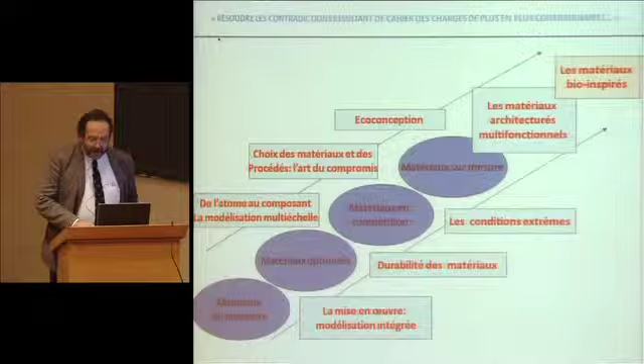That's not the reason why I put this lecture here. It's because the entire course was constructed around the rationale of going from materials encountered by chance to materials made to measure, with the very specific ways in which you can fill in the gaps in material space, by using all sorts of methods, such as combining different types of materials or different geometries, which is what I called architectured materials.

And we're now looping the loop of this course with bio-inspired materials. I'm going to tell you about natural materials and how analyzing these natural materials can help to develop ideas for new materials to further fill in the gaps in the material space. In a sense, we're really looping the loop because there's nothing more encountered by chance than natural material, and there's nothing more made to measure than an architectured material.

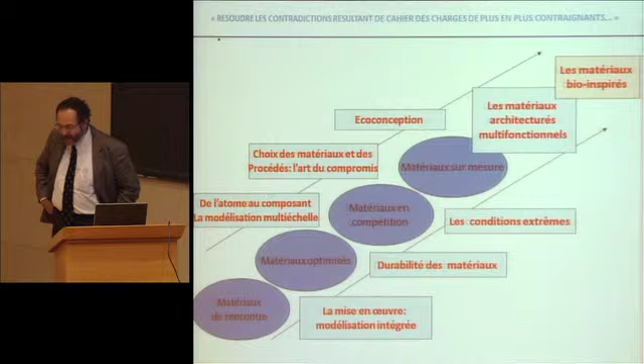So today's lecture is really in conjunction with the seminar that follows and the workshops this afternoon. It's really going to reflect the fact that it's a changing discipline. Obviously, I'm not going to cover all of its aspects in only one hour.

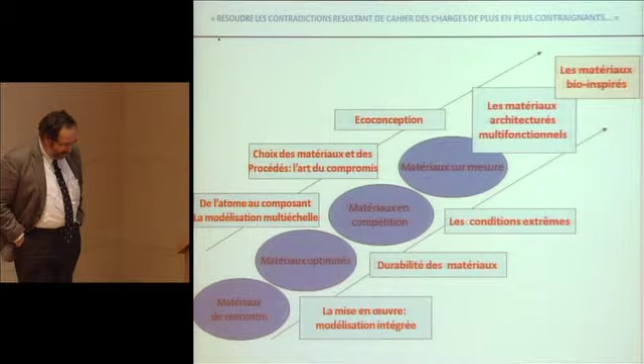What I'm going to do this morning is to tell you about inspiration that can be drawn from materials that are going to be solicited statically. John Dunlop will then, from Potsdam, give you the seminar, where there's a group who were working on biomimetism, and we'll talk about dynamics, not only the materials themselves, but their actuators.

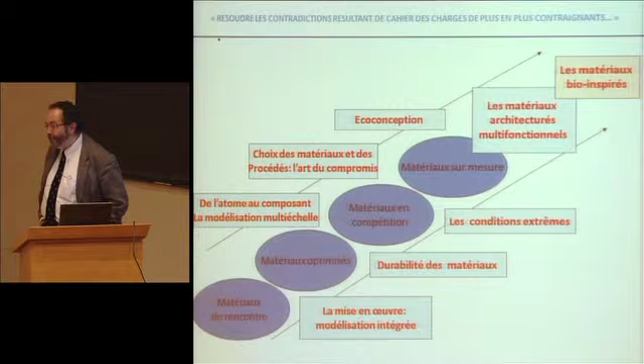And this afternoon we'll have a workshop around a certain number of issues inspired by nature. We'll have a presentation about diffuse interfaces. They're not necessarily strict interfaces; there might be benefits in these diffuse interfaces. We'll have a talk about how we can design bio-inspired materials, one about the biomimetic aspects that you can have in various devices, drones, olfactory sensors, and so on and so forth.

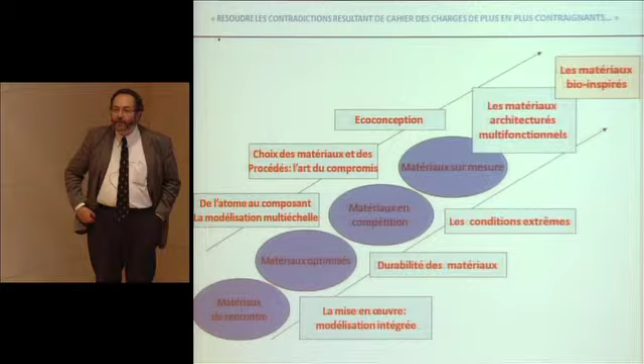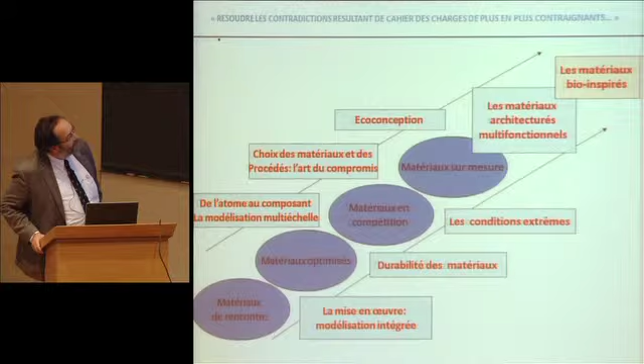And this afternoon we'll illustrate a whole set of different situations in which inspiration from nature is important. I would like to say that it's inspiration rather than imitation, which are quite two different things. We're trying to find in natural solutions ideas that can help to develop materials. So there we are, right up here at the right, and we've covered all the rest.

So I'm going to start by telling you about a particularly efficient engineer, the spider. When the spider makes a web, it has a certain number of functions. I'm not going to tell you that spiders are particularly smart animals - I don't know how many neurons they have. I think it doesn't have very many brain cells, but it can make some pretty clever things.

If you look at a spider web, it has at least two functions. One of it is to hang properly to the branches of the trees, but it also needs to dampen the shock when a little fly hits the web in order for it to be captured. So we have our good old contradictory friends, solidity and energy absorbent.

One of the engineer's nightmares in the automotive industry, for example. So the spider solves the problem by using the same polymer throughout. This polymer, same chemical composition, shown in red here, to make the outer beams, as it were, to ensure the solidity, and then it's going to use a highly crystallized material in order to do this.

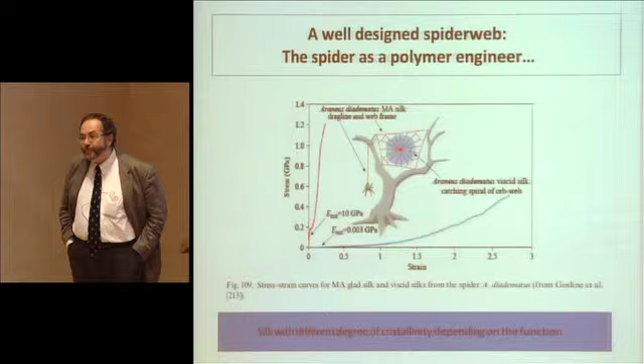So, in a sense, this is the way in which a smart engineer would have solved the problem. You can't have a single material to do both, so you can fine-tune the geometry of your material in order for it to fulfill what you would like it to.

So after this little idea of catching flies with a spider web, let's first have a look at the principles of natural materials. And we'll then see how, based on these principles, we can try to solve or circumvent contradictions in specifications, which is a leitmotif in all of this course. It's how you can combine contraries, how you can ask a material to do things that it naturally can't.

If you look at engineering materials, you have all of Mendeleev's table, so a great variety of materials, and it is manufactured from melts, powders, solutions, in order to obtain an exact design.

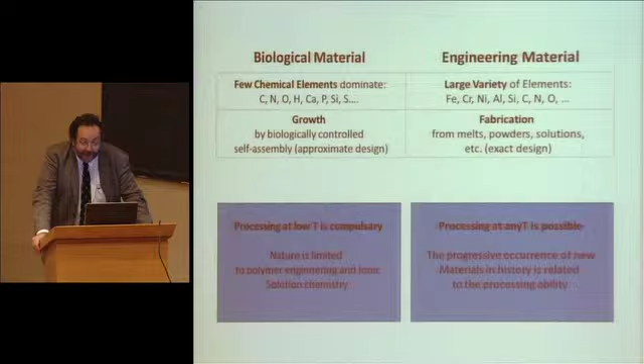If you look at what this implies in terms of processes, biological materials have low temperature processes. They're mandatory, in fact, because they're essentially limited to polymeric engineering and solution chemistry. On the engineering side, you can use pretty much all sorts of temperatures with some pretty violent processes, and the evolution of materials over history, as I showed in the first course, is very much linked to the available energy, the temperature that could be reached, which has opened up new ways to use materials in engineering.

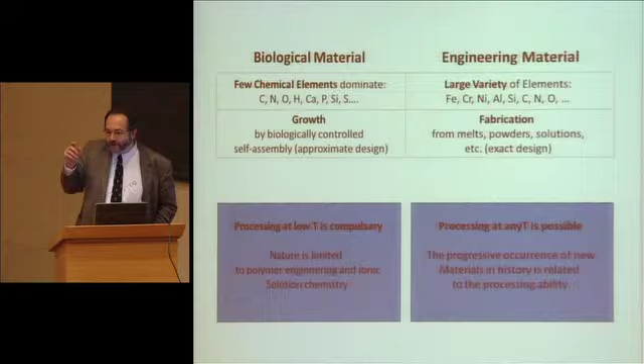So there are bridges, of course, between the two that already exist. What is called soft chemistry - Clément Sanchez is working a lot on that. We're trying to develop artificial materials with bio-inspired chemistry that avoids these very high temperature processes. As I said in the inaugural lecture, what I'm trying to show is that there are material creation processes that try to make very large amounts of material for a very small cost, which is typically the question for a structural engineer who needs tons and tons of material.

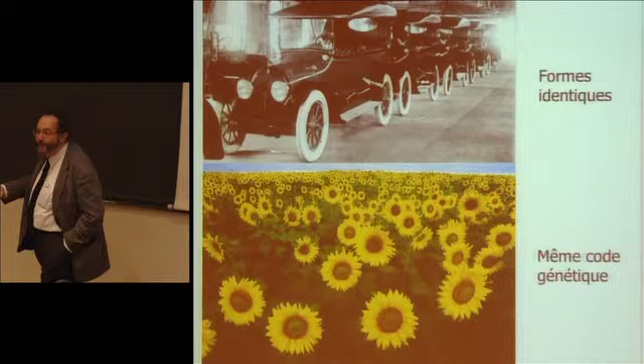So if I continue the parallel, this is a nice picture given to me by Peter Fratzl, the parallel between a Ford T, a high-tech object where they're perfectly identical and follow the plan, and this field of sunflowers. Of course, they're not entirely identical, but there's a single genetic code that allows them to look alike. If an engineer had made sunflowers, it would be less pretty because they'd all be exactly the same. And if nature made Ford T's, I'm not quite sure, we'd have something very easy to repair because it would never be exactly the same shape or size.

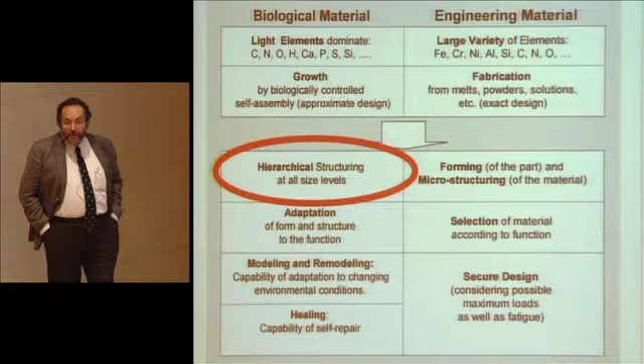First principle we're going to examine, common to all biological materials, is that they have a hierarchical structuring. The key part of the microstructure in the understanding of materials' properties. As regards biological materials, you need to think in terms of microstructure at many, many different scales, with a hierarchy, much more than in artificial materials. So there's a hierarchy of structures at pretty much all levels, all scales.

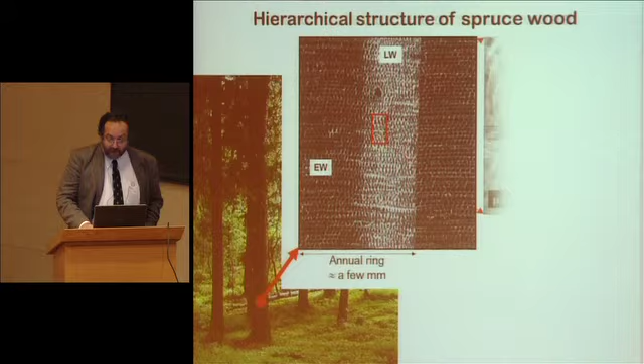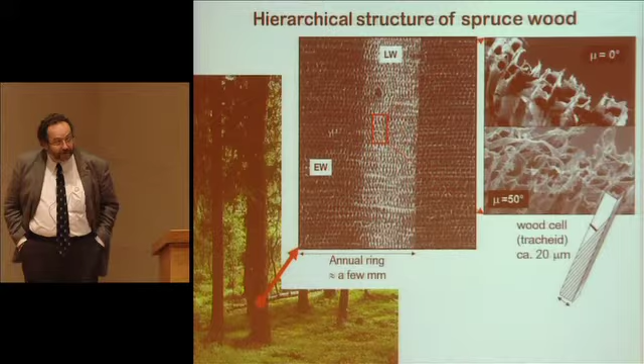First example of natural structure. And you'll have a talk this afternoon that will tell you about something that concerns wood architecture. Wood is more or less dense. The winding angle is more or less sharp, and the mechanical properties are different, and that allows you to understand a certain number of actuators. It's one of the aspects that John Dunlop will probably also tell us about.

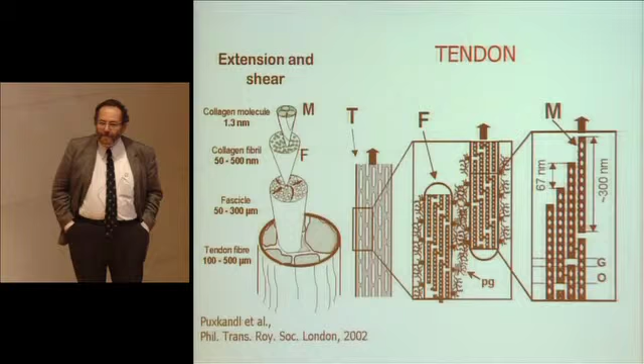Now, if I look at something from another very smart animal, the turkey - you see, spiders, turkeys, all sorts of very, very smart animals. If you look at a tendon in a turkey, you start to look at it and you say, this is starting to look very much like a cable. It's a cable of a cable of a cable. And you have a whole architecture which can go all the way down to the nanometer. All the way.

Osteoporosis, that's what it is. Obviously, it doesn't work so well when you have a hollow bone, because eventually it snaps. And for the vertebrae, that's why kids grow and adults shrink, because you accumulate and compress the vacuum formed.

So at least this type of bone is formed of cellular material. We've seen cellular materials as examples of architectured materials, and it has exactly the same elemental bricks, which result either from solution chemistry, hydroxyapatite, or organic materials like collagen, and you're basically going to have exactly the same result. Either you'll have the cortical bone, which is the bone around it, or inside, the trabecular bone, which is the more porous material.

So you have a number of ideas that seem to appear very naturally. In fact, every time you have all of these scales that stack one over the other, one interesting thing is every time one of these phases is fragile, we try to make them as small as possible. Damage resistance, which is another nightmare of the engineer, is concerned here. So, what are the main benefits of scaling down, of having smaller, fragile sections?

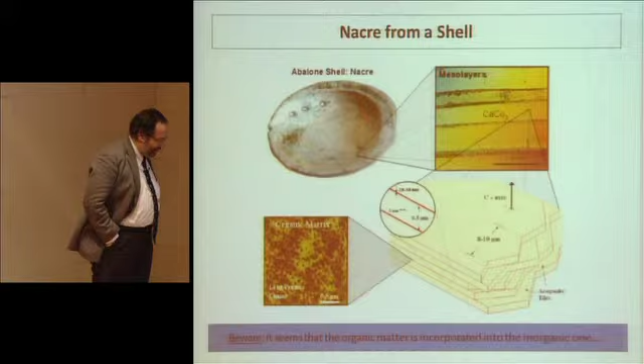This is an emblematic example of biomimetic materials. Look at the oyster shell. It's a fantastic material. Every time you eat an oyster for Christmas, you can notice that it's very tough, and you can actually cut your fingers when opening them.

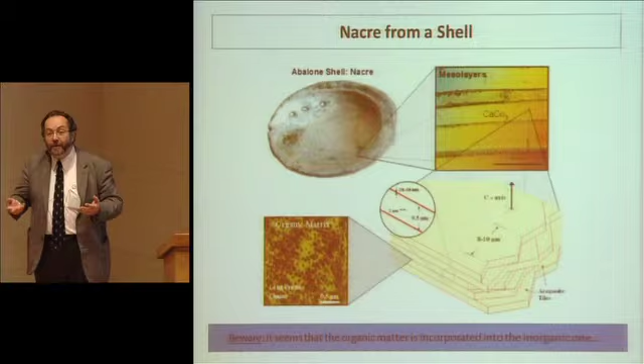But from the brutal point of view of the engineer, you have a set of platelets which are fragile, which are pre-fragmented. Starts to look like what I was telling you about interlocking materials, and they're sandwiched with organic matter, which is not very rigid, but which has a very high energy dissipation capacity. So when you want to crack that, the crack ends up all bogged down into the biological material, because it absorbs energy, this protein fraction. And the crack's energy is dissipated very efficiently.

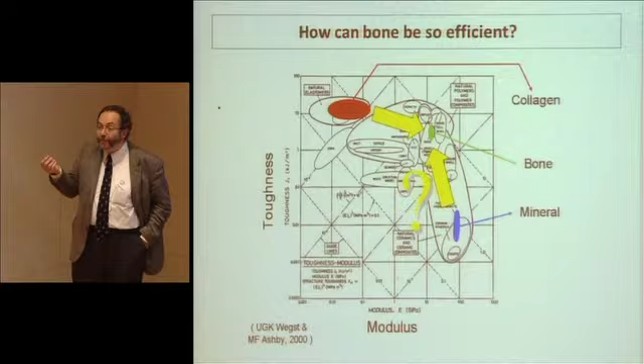So obviously mechanics is more subtle than just mixing two things in heterogeneous environments. You know how to create a certain number of landmarks where you're expecting a particular composite. Meaning that what we've done is that, in a sense, we've modified the properties of the constitutive material simply by integrating it into the composite in the manner in which you do this.

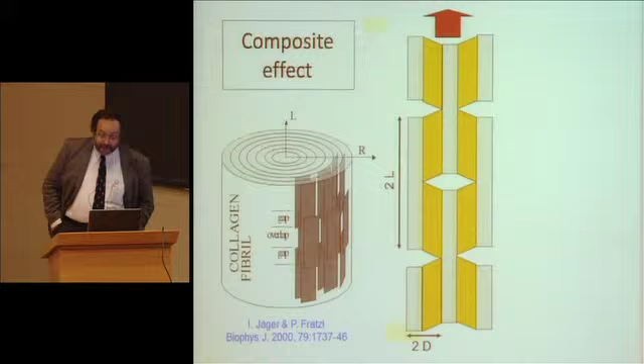One of the visions of the composite effect could be encapsulated like this. I think it's quite interesting how Potsdam has examined biomimetism. It's to try to simplify things as much as possible, not just to describe the mechanical properties — you just need adjustable parameters for that — but to draw from your understanding of the mechanisms a few simple principles that are going to allow you, at least on paper, to develop interesting new materials.

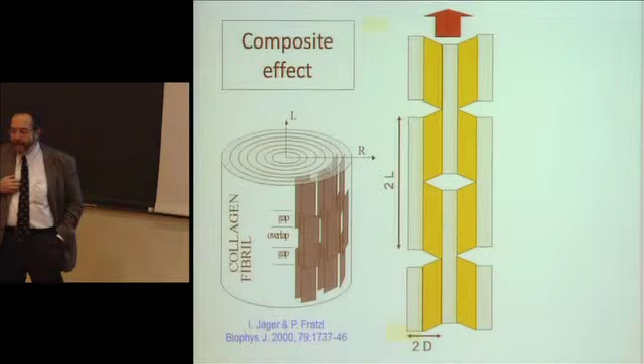One of the things that was done was to note that the structure you have in a composite is essentially formed of soft and hard matter, and what you have here is an aspect factor. You have a length that is much longer than the width. If you look at a composite such as this, you have some very rigid elements and a matrix which essentially transmits shearing. You can see that the modulus of the composite is essentially the shearing modulus of the matrix, which is low, corrected by the aspect factor between the length and width of the element.

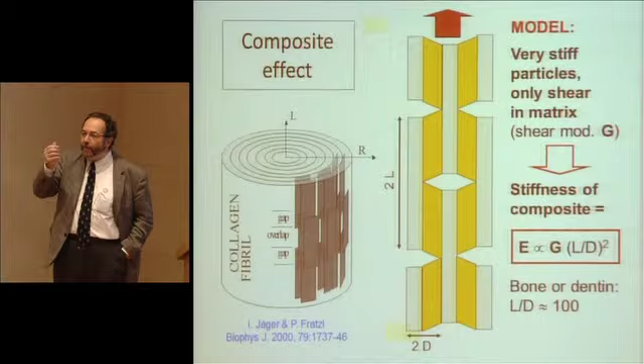If you take bone or dentin, which is what constitutes your teeth, you can have a factor of 10 to the power of 4 between the shearing modulus of the polymer and the traction modulus of the composite. What you can draw from that as an engineer is: you can be in a situation where if you have a very powerful aspect factor, you can have a much higher modulus than the modulus of the weakest part.

Second thing, this is truly mechanical. People who work in mechanics hate scales, and physicists hate limit conditions. But beyond that, if you look at the scale, imagine that there is a crack in the hard part, the grey part here.

I take a crack of length A, and if I want to calculate the stress it can withstand, I say it's essentially the dissipated energy required to propagate it. So you have interface energy with a rigidity modulus, divided by the crack length. What we're saying in terms of physics is that when you have a crack of length A, what allows it to propagate, if you're releasing elastic energy, happens within a volume that varies as the square of the crack length, and that varies with the length of the crack.

So you have one term that varies like the square and one that varies like the length, and you obtain a length below which the crack does not propagate and above which it does, and it depends on the elastic energy that is stored.

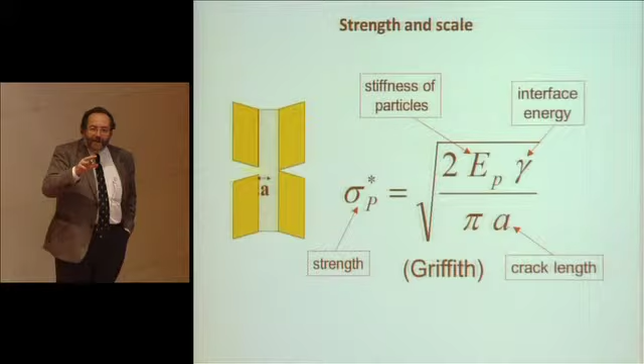So I've slightly exaggerated, but this explains in a sense why bones, wood, and mother of pearl shells can be interesting in terms of damage resistance and damage tolerance.

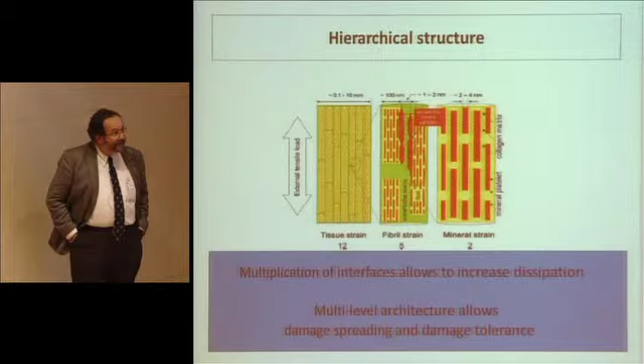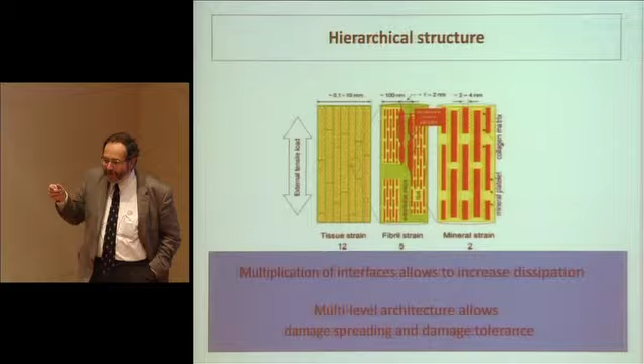So once you've done that, you have another scale. I've only talked about one type of architecture, one scale. I can't go into much detail here, but the basic idea is that when you're making a composite of a composite of a composite, a whole hierarchy of architectures, you end up in a situation where cracks are always subcritical versus the scale above it. So the crack propagates very, very slowly, giving you damage tolerance that's particularly effective. These are ideas that have been developed by Gao.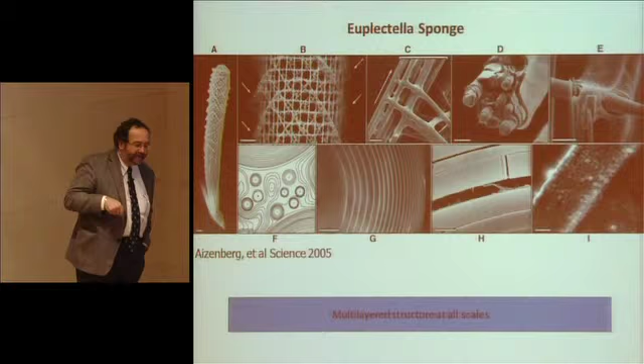The optical quality of the glass is amazing. It may have an influence on the reproductive mechanisms of the shrimp. It's very good optically, but then of course glass is not very damage tolerant.

And in fact this cage structure is cabled — it has beams and cables, and each of the beams is an onion peel structure. There are a great number of successive layers of glass layered with organic material, meaning that this material is particularly tenacious.

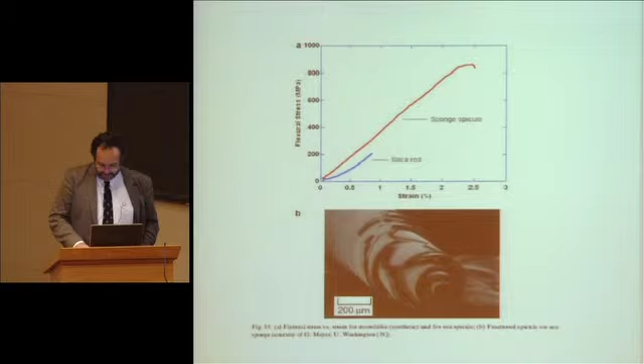So this is the example of a silica rod, a normal rod, perfectly — you can just run it through a platinum mold. Then you can take the same glass structures with one of these onion peel structures, and you will see, in terms of the breaking point and so on, the difference.

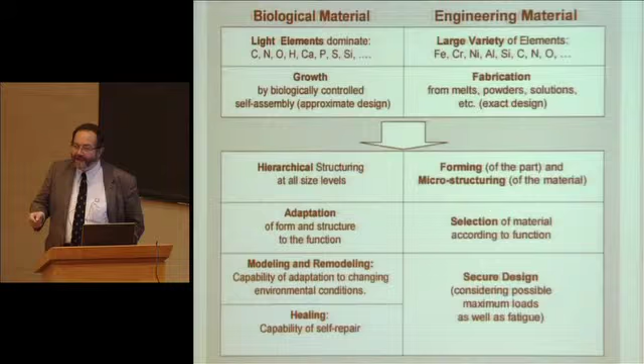So let me now return, now that I've just looked at living materials — I've looked at them as if they were dead, wondering why it works so well. Now we're going to do something else, a little bit more subtle, which poses a number of problems: we're going to look at living biological material that's alive and how it grows.

One of its characteristics is that the system can adapt when there is a low variation in the conditions. Imagine if you have a bridge, when there's a flood, the feet of the bridge will swell.

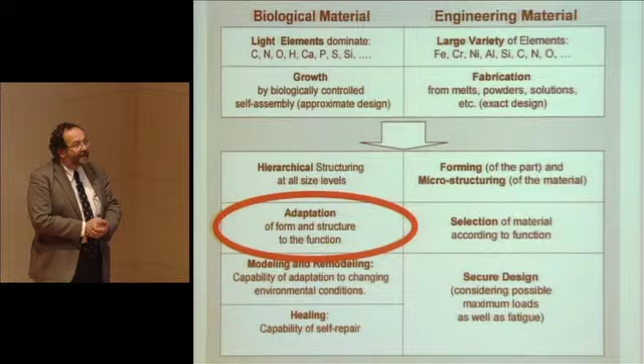What you do is that you build them. When you build a bridge, you try to factor that in, make sure that the bridge won't be swept away.

What's interesting in nature is that, in a sense, if the variations are not too brutal or extreme, there can be an adaptation. Evolution is not the right word, but there can be an adaptation of the structure that is in the making.

Don't confuse the Eiffel Tower and a tree. They essentially have the same function: to climb as high as possible with a minimum amount of material in order to not buckle under its own weight. So in 1889 it was to show how clever we were, and for a tree it's to go up as high as possible to catch the light as much as possible. Basically it's the same purpose, mechanically.

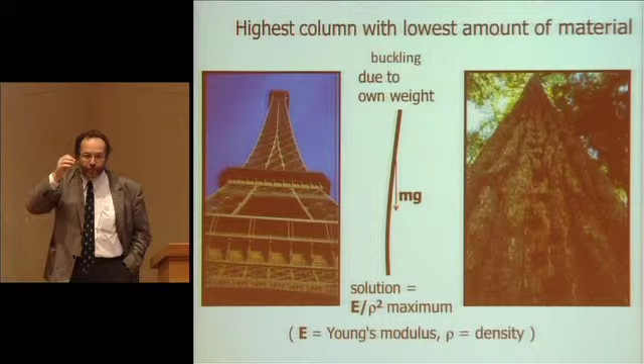So the result is to say we need to find a material where the root of the elasticity modulus divided by its density is maximum. You want to go as high as possible with a column structure which must not buckle under its own weight, which very quickly brings you to the fact that the best material to make a tree is probably wood, which is not really much of a surprise.

But one thing that's interesting is that you may imagine a tree growing unfettered. You can see it here if it's growing in a coastal area with a lot of wind, and there you develop a certain number of structures. You have roots that are bigger on one side than on the other. The tree, in a sense, develops its own substance to adapt to outside stress and solicitations. It can adapt to these unpleasant conditions as long as they're not brutal. If there's a hurricane, the tree's uprooted. So, the adaptive growth of the tree.

Let's have a look at another way that this can happen, which I think is very, very pretty: how you can play with the architecture on the level of the cell. You have these cells here, which are a fibrocellulose composite with this filament wrapped around each of the cells.

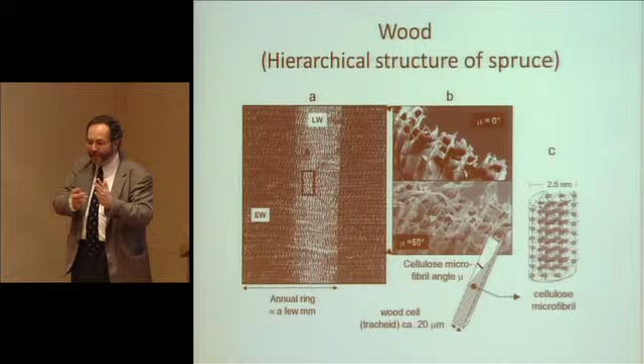So if you're in mechanics, if you want something very rigid and very easy to deform, you again have your schizophrenic engineering problem. You'd think it's not going to work properly, because if you want high deformability, if you want to pull the cell, you would want your wire to be wound this way, but if you want it very rigid, you would like them to be positioned in the same way as the pulling. So if you want wood that's very flexible, you need, looking at the stress axis, something perpendicular to that. And if you want wood that's very rigid, you're going to wind that along the axis.

It's something that can be measured. There have been experiments carried out by an Austrian team consisting of X-ray diffraction, essentially using the same experimental tools as what is used in metallurgy. You can measure the crystalline orientation of the cellulose fibrils, and you can actually take each of these little cells and measure the elasticity modulus and deformability.

Easier said than done. These are micro machines that can allow you to do that. You're pulling on sort of little micron hairs, but depending on the fibril spiral direction - where the angle is close to zero, meaning it's as close as possible to the traction axis - you have low deformability and high modulus, and when the filaments are wound more and more in the circumference of the cylinder, you have a low modulus and high deformability.

So you think, as a professor in materials mechanics, this is great fun. If you take the branch of a tree, the interesting thing is that the only thing that's alive in a tree is the edge. In the branch you have a history of the tree. People who do climate history love it because it allows them to know what the interval between summer and winter was 600 years ago.

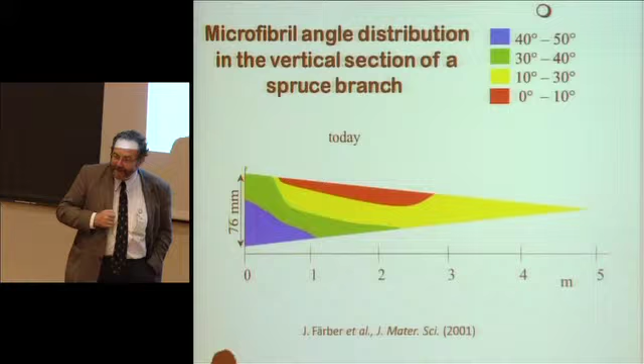But here we're just going to take a branch picked up by the Austrian scientist, who is going to be measuring the cellulose microfibril angle distribution. The situation we have today is that the external part of the branch has 0 to 10 degrees.

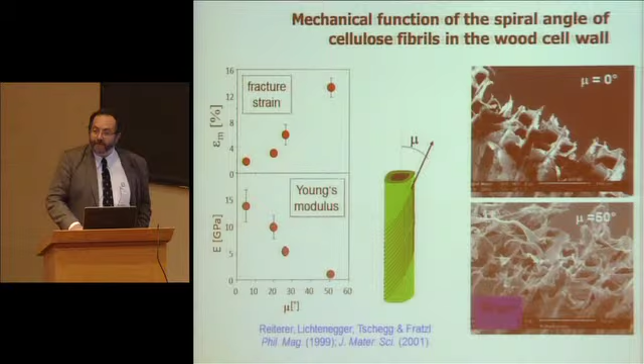So it's a very rigid part, and as you move away from the upper part, you have a fibril spiral angle, which is around 40-50 degrees, something very flexible.

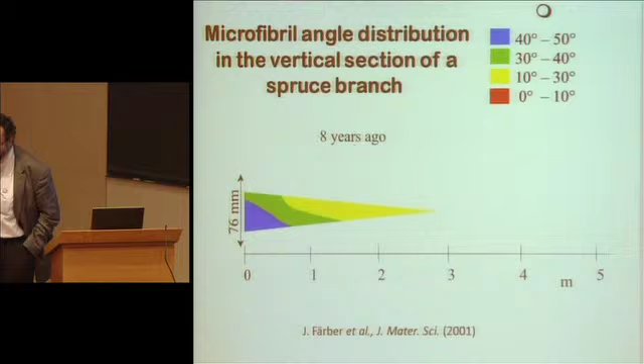So if you look at this tree branch, if you look at the rings, the circles in it, you can have the history of its life. That's what it looked like 5 years ago, 8 years ago, meaning that 8 years ago the branch in this Austrian spruce, in a place full of snow, grew in order to have the capacity to bend when snow falls upon it. So you need to have something flexible.

And gradually, as the branch grows, it needs to bear more and more weight, it needs to extend further and further, it needs to withstand snow more and more, and it's going to need to be increasingly rigid. So what you have here is functional adaptation with the growth of the object, adaptation to the structure at the smallest scale to obtain this type of growth.

So that's the tree solution. The bone has another solution, which is not to adapt the finest architecture, but to adapt the highest architecture, meaning that for bones you adapt in terms of the cell structure and not in terms of the assembly between mineral and organic substance.

So if you look at a bone, that's something else which people in mechanics find completely fascinating. Nothing new, this interest in natural solutions. It's what has been called Wolff's rule. He had very rightly said that a bone was a Gothic cathedral - in the sense that structure calculations were done almost by hand and not with computers, the way in which the Eiffel Tower was calculated, essentially.

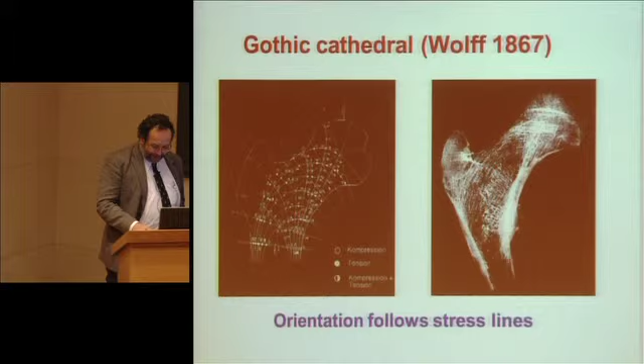I don't really believe in a particular finality, but this seems to work very well.

What has happened is that here there's a dynamic balance that makes it possible to spread the bony material in a sense to address, to answer the load to which the vertebra is subjected.

If you think of a baby that has just been born, and just paddled around in the placenta for 9 months, G equals 0, floating in water - you wonder why they actually bother to come out at all. But babies...

Baby bones are essentially isotropic. And then, of course, gradually, they've just discovered this thing called gravity, and the bones start to structure and spread the mineral substance around in order to address outside stress, which is not very violent, except when they're actually born. And then gradually they're going to move around, they're going to start running, and the bones are going to grow to respond to muscular effort, which is why when you send astronauts up in space...

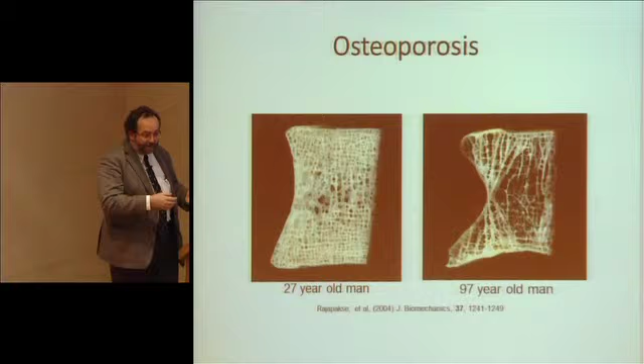I'm sure you've always wondered why they sit around space stations cycling or running around. It's not just to keep them busy, it's because they would tend to be empty, to lose their mineral content, and if they come back to Earth they break, and you can't break astronauts, they're expensive things. So they need to have this force to force them to organize the material to withstand an external force.

So what actually happens microscopically? It's not that clear, but I'll give you a version that would probably make doctors scream. It's really an engineer's approach. There are 3 types of cell. I'm sure John will correct me if I'm wrong.

You have osteoblasts, which deposit the mineral substance. You have osteoclasts, which remove the mineral substance, because mineral is something very precious in human beings. So the trick that bones use is to place the mineral substance just where you need it. It's not just saying, okay, I need to go and get some outside - it works by local recycling. So that's what osteoblasts do. Osteoclasts destroy.

They take the mineral substance where it's not needed, and the osteocytes tell the blasts and clasts where mineral substance is needed or not. So essentially you have a structure. This can be connected to the piezoelectric properties of hydroxyapatite, but there's a signaling structure that's not that easy to comprehend. You have cells that have the capacity to say where there's stress and where there isn't, and to carry the substance from where it's not needed to where it is. If you think about it, that's pretty smart.

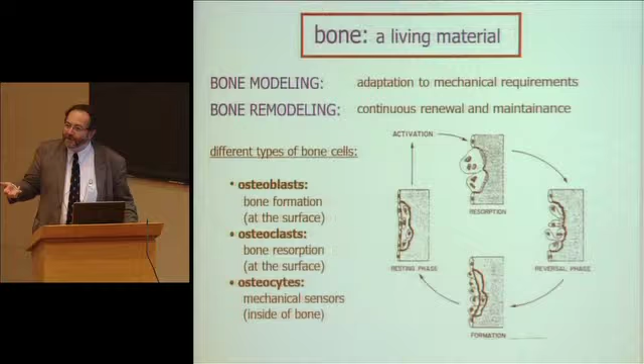You can actually look at what's happening in a bone to try to imagine methods to make aircraft lighter. So the parallel between bone and wood, they're both structured materials, probably not only structured materials actually. The bones are of course structured materials, but they're also a calcium reserve. So I think you need to be wary of finalist approaches, because you can always say that it's perfectly optimized, but in fact we don't really know why.

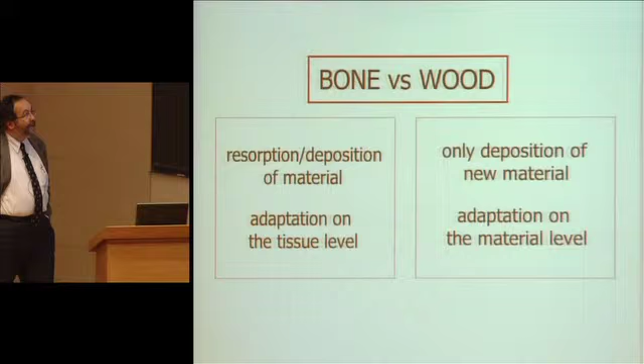As a specialist said, the bone is a solution to a problem, but what's the problem? How you can adapt a structure and architecture based on outside stress. If you take the bone, you have a resorption deposition of material, an adaptation on the tissue level, meaning in the porous structure itself. And if you take wood, you only have deposition of new material, and adaptation occurs on the material level, in the exact shape of the composite.

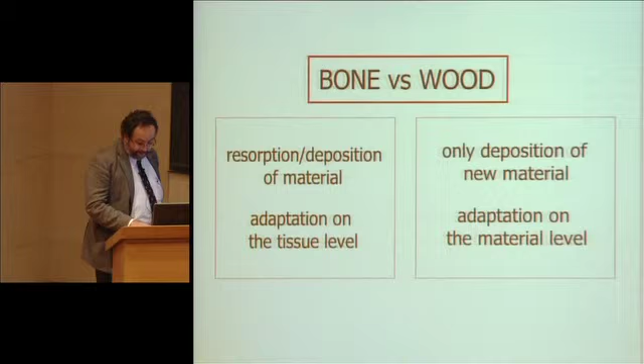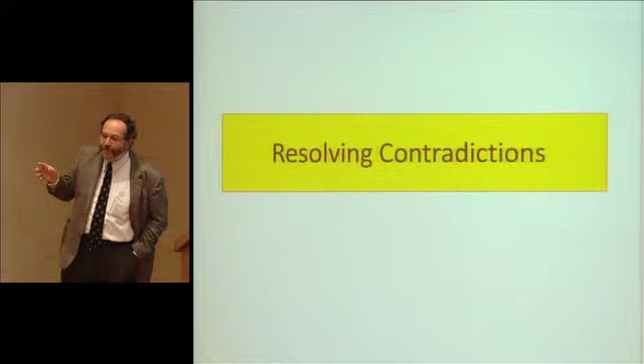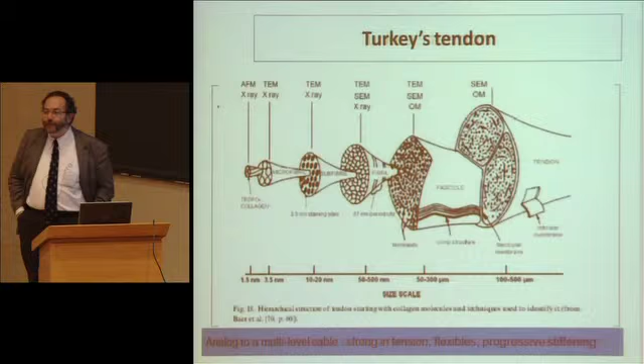Which brought us to identify a few essentials in the structure and production of these natural materials. Of course, this only happens through gentle chemistry, no brutal chemistry. So let's look at resolving contradictions, which have very much been the leitmotif of this course.

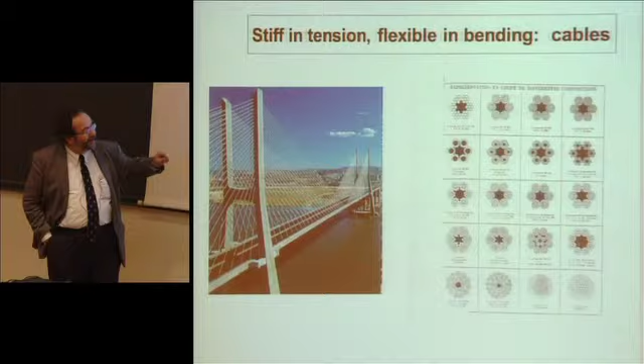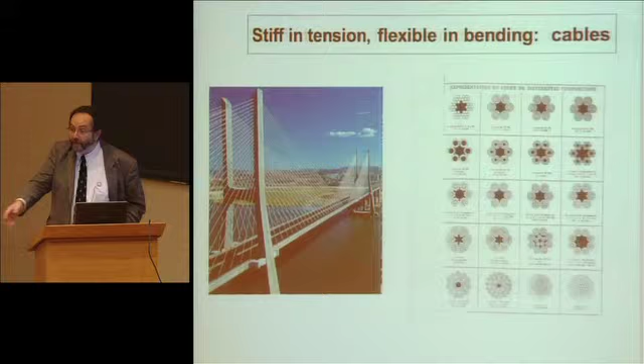We didn't wait for bio-inspiration to create architecture systems. It's actually quite interesting for people who have a curious mind. These cable architectures are actually approaches that are very often empirical. To try to have a scientific approach that's not empirical but purely mechanical is something that still needs to be further explored. So just to show you this fine picture of a bridge and to tell you that there's plenty of things that could be done. It's not just civil engineering that should have been solved 150 years ago. Still hasn't completely.

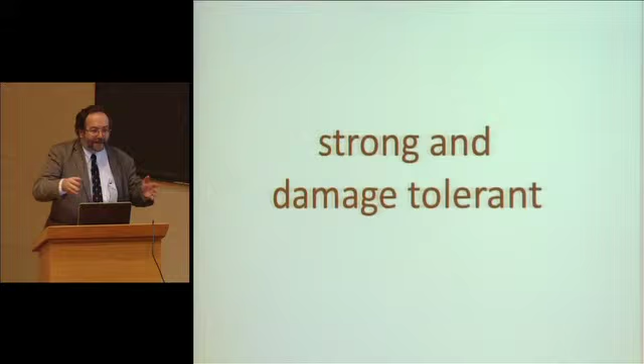So let's look at my favorite contradiction. We want something that's strong and damage tolerant. I know, it sounds like I'm a bit obsessed with that, but this is one thing that we saw.

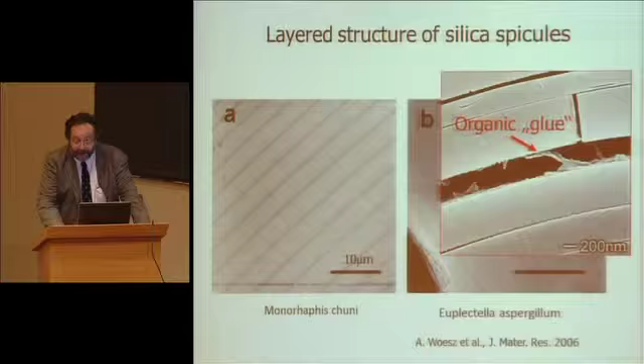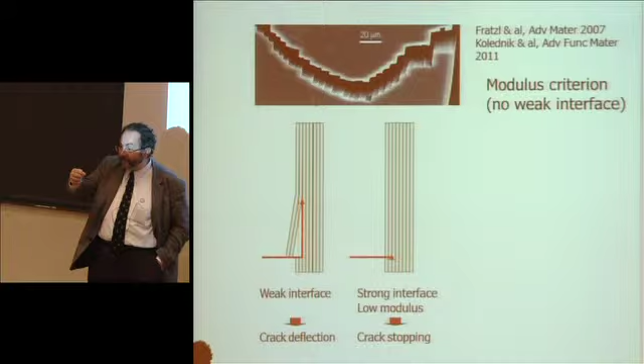Now, what I wanted to show you, the rationale behind that, is that if you take a crack and try to propagate it through this multi-layer structure, there are two effects you need to bear in mind. There's one effect, you can have a very weak interface, in which case the crack is going to try to deviate. And that's what people who make ceramic composites that can withstand high temperatures do.

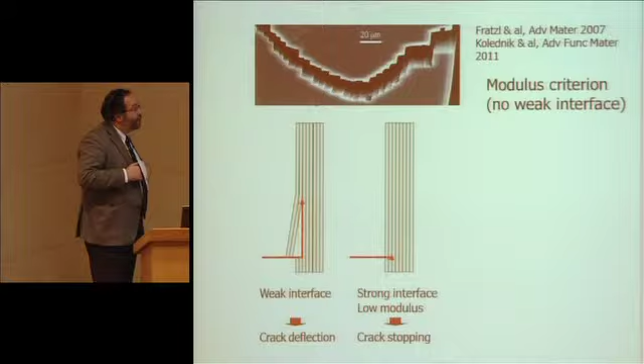Another example of extreme materials that we could have discussed but didn't. But essentially, ceramics are very rigid, work at very high temperatures, but are unfortunately fragile. If you have a ceramic composite with fine structures and a great number of interfaces, if there's a crack in there, it won't propagate easily. It'll have very long propagation paths because it's just going to follow the easy interfaces. And that's how you can obtain plasticity, the damaged plasticity. It doesn't snap, but it just gradually breaks, leaving you a little bit of time and absorbs lots of energy by doing this. Another solution would be to stop the crack by having a very low modulus.

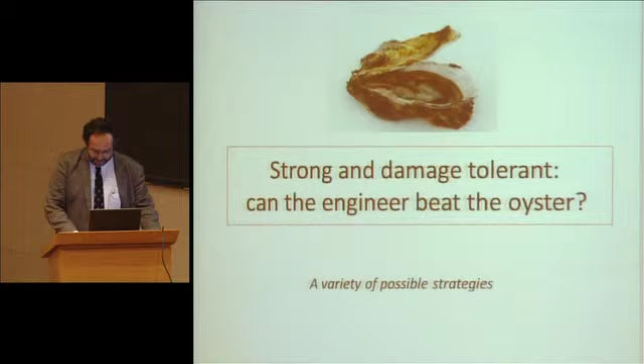Now what I would like to show you is, can engineers be smarter than oysters? Which would be quite reassuring when you look an oyster in the eye. It doesn't look very bright. So there are a certain number of very interesting potential strategies.

One of those could be a microstructure gradient. That is the tooth strategy. If you take a tooth, you have a hard, soft, and hard structure. The hard structure makes it wear resistant, and the soft structure allows it to have cracks that do not propagate because, again, they get stuck in a zone, an area that dissipates energy.

If you take a milk tooth, the hard part is very thin and the soft part is very porous. If you take a wisdom tooth, you have a relatively low porosity part because it grows pretty slowly. But it's the same materials, the same elementary blocks.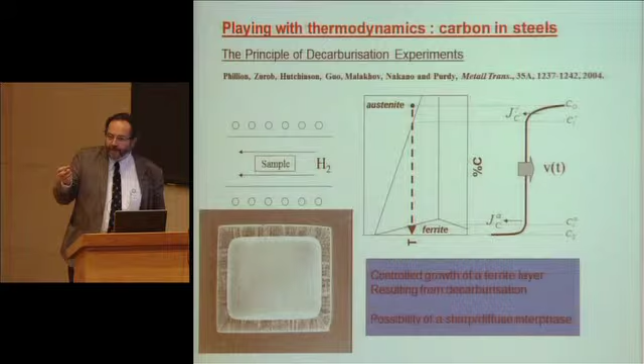So how can that be done as an engineer? You take a steel with a lot of carbon, place it in hydrogenated argon. You take the carbon from the steel and you end up with a decarbonated layer on the surface, and therefore a soft layer. And you've even changed the phase because you now have a decarbonated layer on the surface that's ferrite.

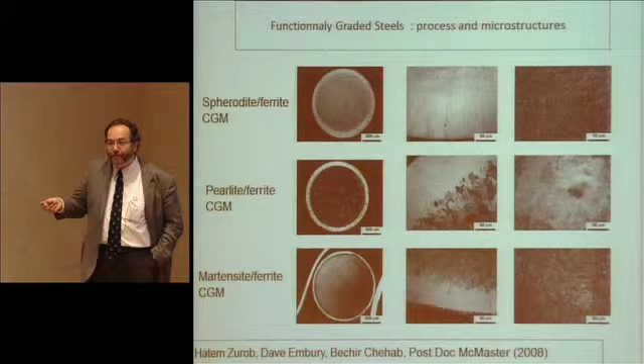And there you can change almost any microstructure you like to have something that's very hard in the middle, pretty soft on the surface, and damage tolerant, because surface damage does not propagate to the core. You're just limited by the size of your oven here.

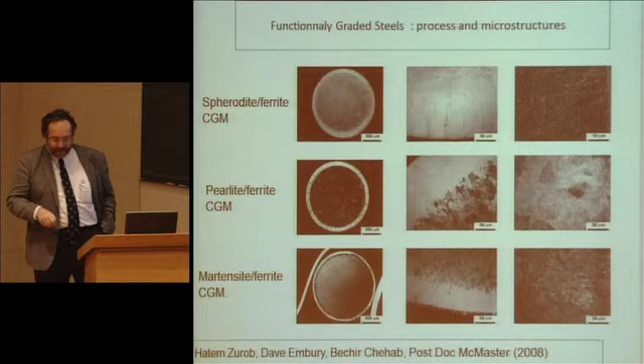What you can do is actually recarbonate the outside so you can have hard, soft, hard. That would be a way of making ball bearings that are both very hard, that can withstand heavy loads because the core is hard, but that are very wear resistant or damage resistant because the crack can't propagate. So it's a way of making a fragile material more ductile. So that can be done not only in chemical terms, it can also be done in terms of microstructure.

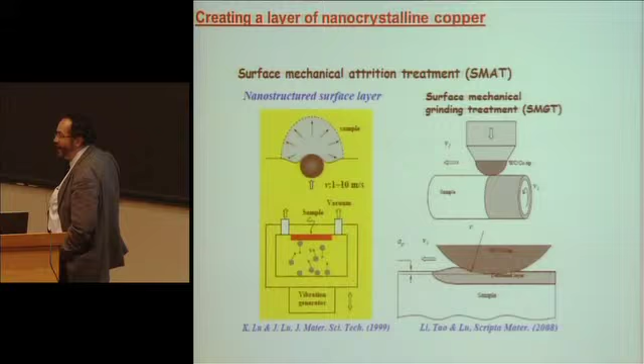That's the trick, known as SMAT, Surface Mechanical Attrition Treatment. It's a surface treatment that's quite brutal, not necessarily at room temperature. And you can have a copper part, for instance, with a lot of deformation, overblasted, where you have high elasticity limit and high ductility.

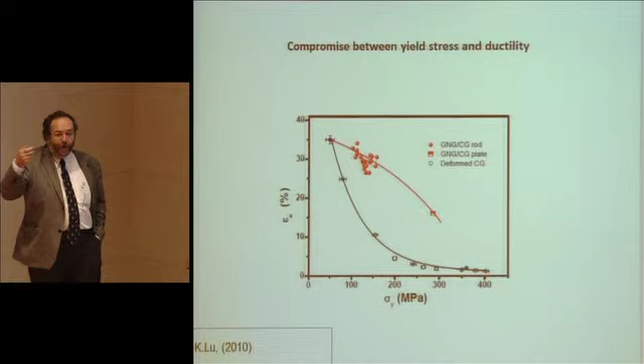So again, a case in which you're trying to play not on the constitution of the material, but on a gradient of microstructures. So you have seen another strategy, which is that of architecture design, when you try to have an influence on the forms, on the shapes.

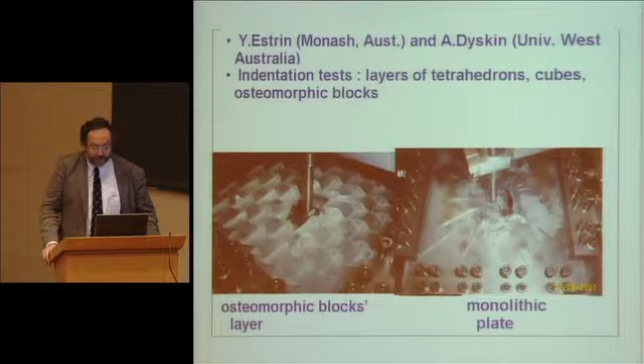Here another very smart animal, the tortoise. I was telling you about the tortoise shell, which is also an interlocking material. It needs to be flexible and solid. The animal must breathe. The solution, what you do is you fracture the plates in order to prevent crack propagation, but done in a smart way so that the different bits hold together.

And say that between these different plates, these different components in the architectured material, as I said, you can have something, you can include, for instance, an elastomer with a plexiglass to absorb the energy. You can change the condition of friction between the various blocks. That would be another solution to try to make a made-to-measure material.

I was telling you about polymers, but it would be quite interesting to do this with intrinsically fragile materials, to have structures that can work in high temperatures.

Before I yield the floor to John Dunlop, I would just like to discuss biomimetism in structural materials. I would just focus on structured materials. We could probably do the same exercise with optical properties, with butterfly wings. There's vast amounts of literature about all that. I did it on the structured properties because that's what was basically covered in this course.

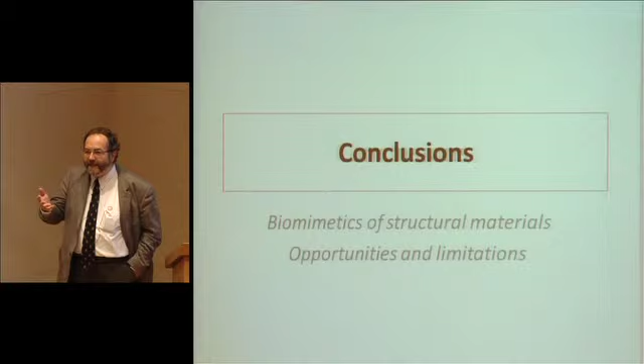What I wanted to show you was not how to find the best material to produce a tree. We know it's wood, but based on an analysis of the efficiency of the materials used to make wood, or to make bones, to try and find a few simple principles to give us product development guidelines.

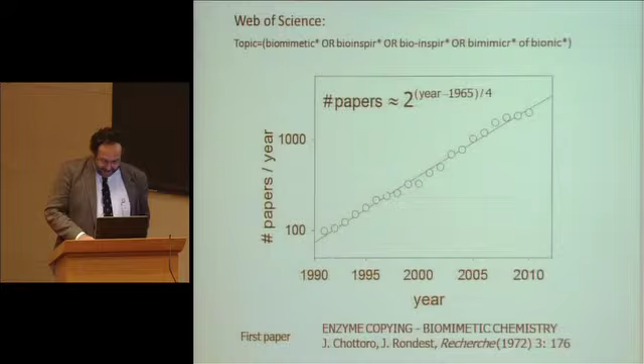It's attracting a lot of people. That doesn't necessarily mean it's interesting, it's not proportional. But actually it is. Obviously it's very difficult to read all of the papers that are published, but if you use observations of materials and try to find the principle in it, it actually allows you a better understanding of the objects you're going to be creating.

So of course the Holy Grail, as you will have understood from all of these lectures, what we're really trying to do is combine the variety of engineering materials with the flexibility of natural architectures, notably its capacity to have hierarchy. We would love to create new materials with radically new properties, and fill multifunctional requirements.

It's essentially what we saw at the start of the course, the roadmap: how do you move from the material encountered by chance to the made-to-measure material. That's precisely what we're trying to do, with as a plus the fact that you want to produce them in large quantities at affordable cost. So, technological innovation for the Scots, or for the people from the Auvergne. I am myself from the Auvergne.

So you end up with a combined approach, combining classic materials science, acting on the microstructure, with classic mechanics trying to influence the structure. I've shown you, both in artificial materials and natural materials, situations with gradients of properties, or architectured materials. What they have in common is that the distribution of microstructures or geometries and local properties varies along a length scale comparable to at least one of the scales of the component you're considering.

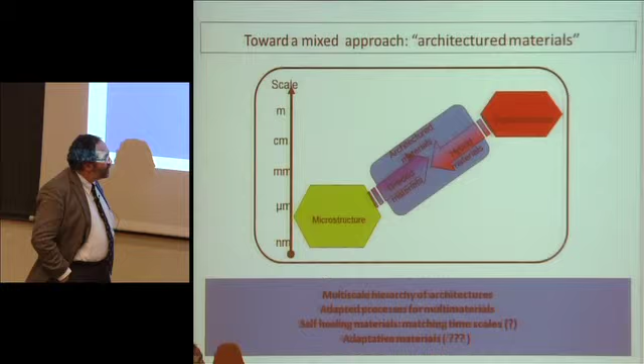So this is pretty much the playing field offered in trying to produce made-to-measure materials. What appeared in terms of natural materials is that there's a multi-scale hierarchy, and adapted processes for multi-materials. That's what nature does, and what perhaps we can imagine we could do.

You're going to see one case where it can be done using specific solidification processes. I told you about soft chemistry, gentle chemistry processes, surface treatments in metallurgy. It's possible, but now there are two aspects that have emerged quite specifically in natural materials: materials that can self-heal, and engineers are not necessarily very good at that.

We saw in durability one example where it could be done through release of a polymerizing agent within a composite that contained capsules. There's a well-known case developed not very far from here with self-healing elastomers. A very interesting case, but this is still really on the cutting edge of R&D. It's not standard in the use of materials.

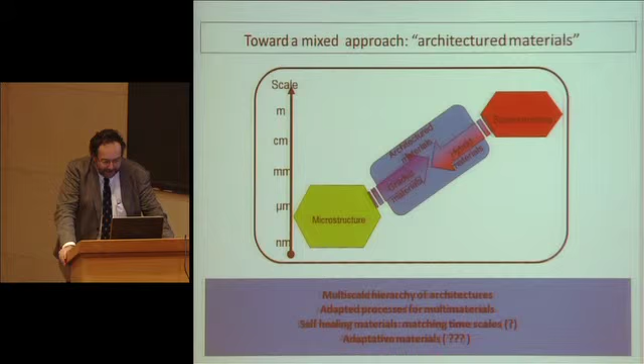And materials with adaptive growth is something that we can't really do yet. But if we don't have long-term objectives that are not necessarily easy to reach, but point the way for development... if you don't want to have these, you're better off being a banker.

So a few caveats. You need to be careful of the Abbé Pluche syndrome. The Abbé Pluche was one of these lovely scientists of the 18th century, who very seriously said that God had created melon in quarters so that a family could eat a melon.

The problem with bioinspiration is not to say everything's perfect, that nature has had everything right, and it's exactly what I need. That's why you need to have this abstract concept of materials in order to develop new ones, in the same way as you pass through the microstructure to try to optimize it, to know where you need to act to improve the properties. You need to abstract from the natural material the principles to allow you to develop artificial ones.

Mysticism is not allowed. Men succeeded in building aeroplanes when they stopped thinking of flapping their wings, because that simply didn't work. It's very important to think in terms of inspiration rather than imitation.

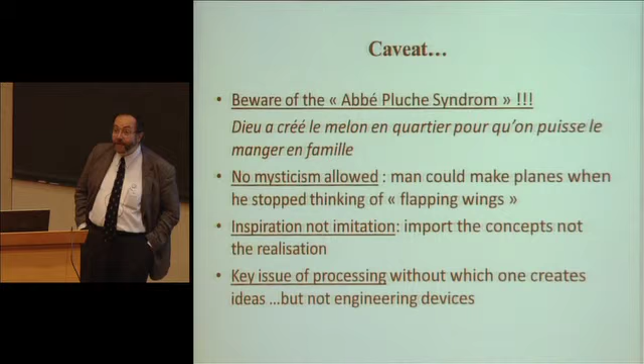And the key point that can make a lovely dream into a reality, I think, from an engineer's point of view, is the process. What are the processes that can allow us to develop these materials? That's really something that is a hot topic in the manner in which we can import new ideas from biomimetics.

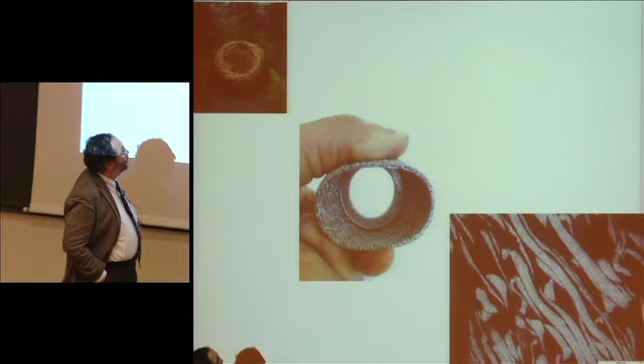Just three little pictures to finish: a bird's nest, a monofilament material in steel, and the microstructure that was on the poster of the Collège de France lecture.